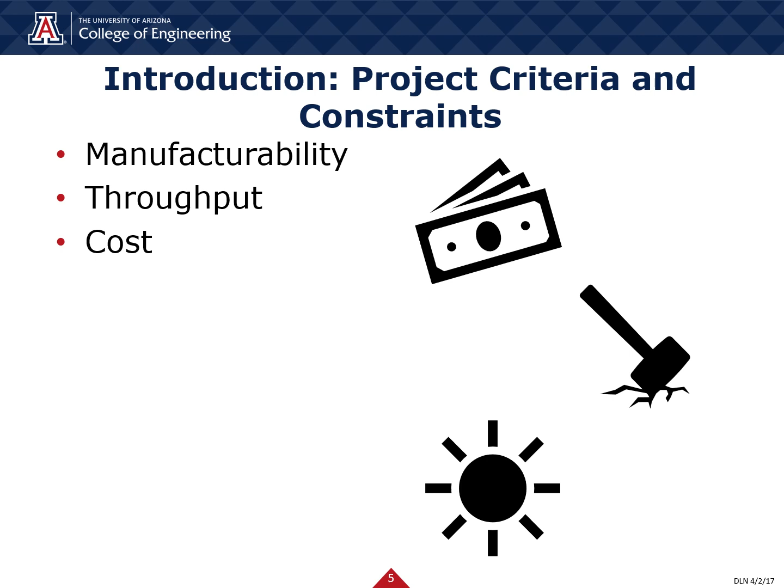The project criteria and constraints include manufacturability or ease of production, throughput as in how many large parts can be made per day, cost in comparison to Hydronalix' current manufacturing cost, density, tensile strength, abrasion resistance, UV or environmental resistance, water absorbance, and buoyancy.

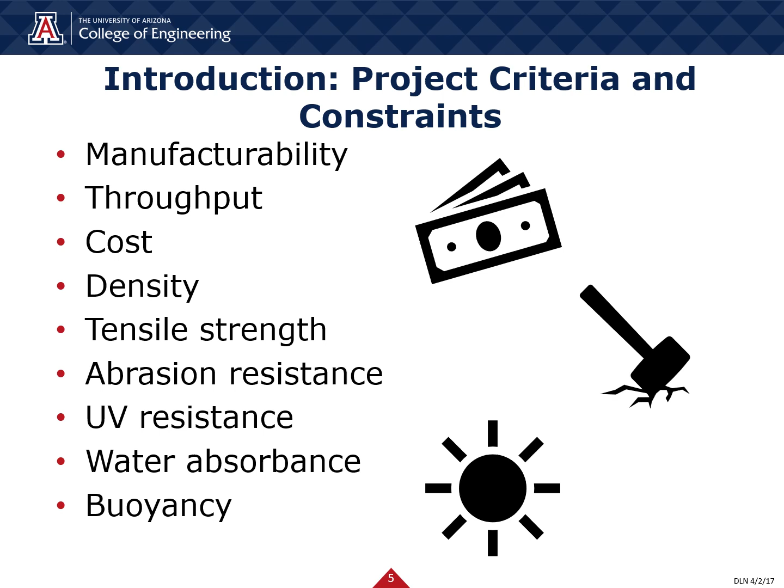Hydronalix currently uses EPP foam, which is expensive and difficult to manufacture, but it is durable and lightweight.

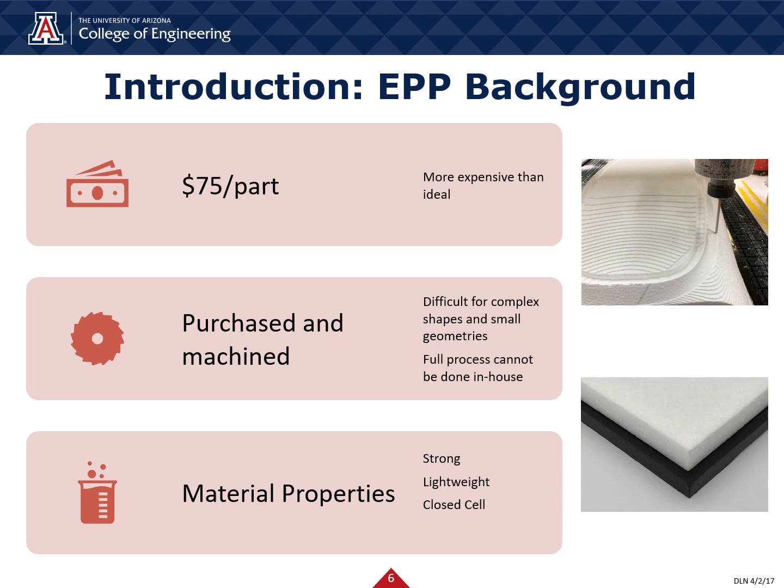In our initial research phase, we discovered hundreds of potential solutions. We first narrowed this down by, per the preferences of Hydronalix, excluding foams which require large and costly foaming machines. Then, through further research and collaboration with Dr. Douglas Loy, we narrowed down our selection to polyurethane foam. We then decided to try two different polyurethane production methods, a two-part polyurethane kit and a custom formulation using raw materials.

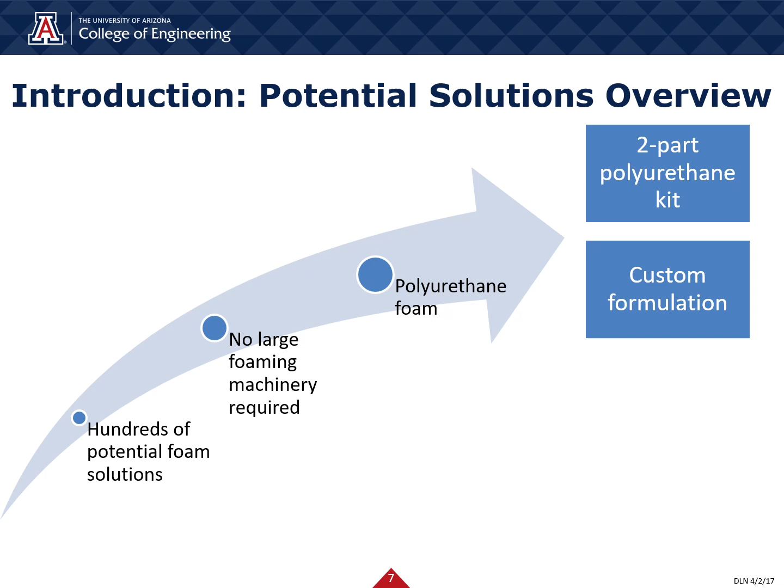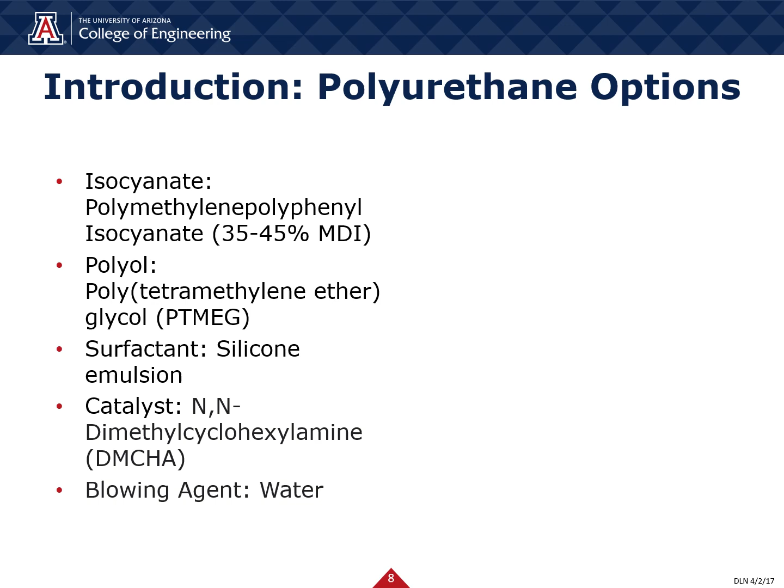Polyurethane foams are made by reacting polyols and isocyanates, along with other reactants for different foam properties. The polyurethane foams used in this experiment were a two-part foam kit and a custom foam formulation.

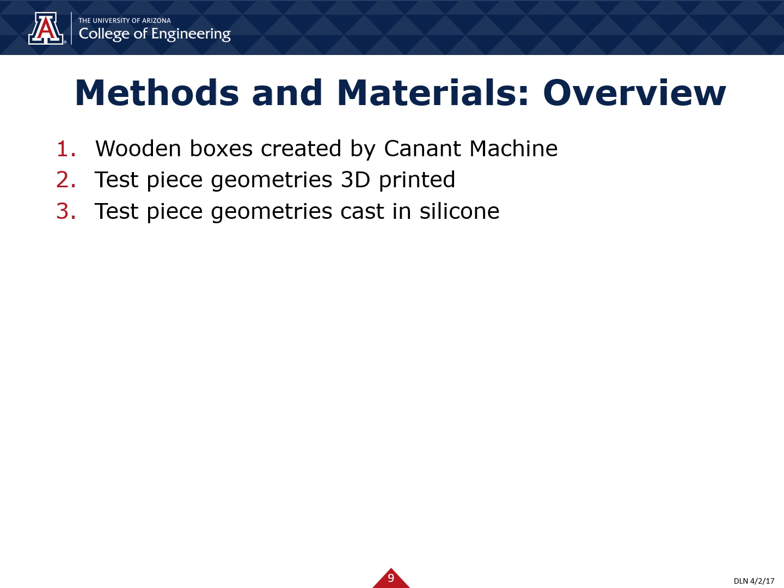To make the foams, wooden boxes were made and silicone was cast around a 3D printed part. Once the mold cured, the components of each foam type were reacted within the mold, and these foam pieces were used for mechanical property testing.

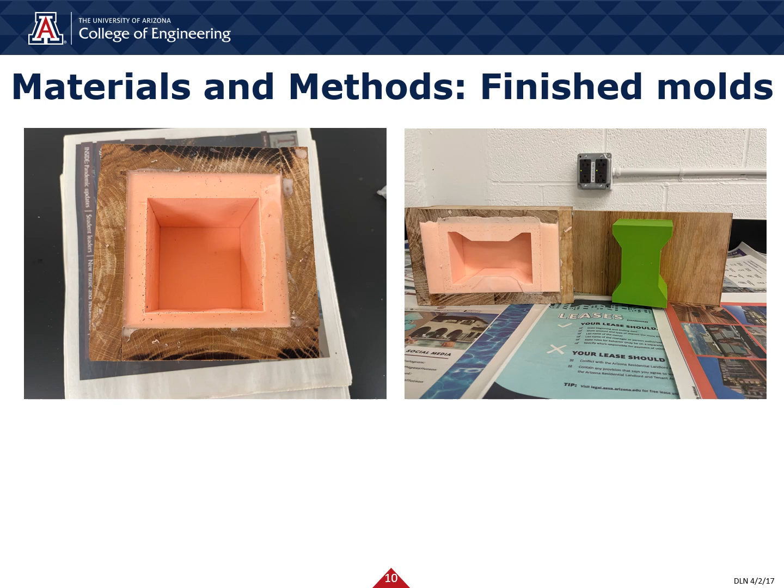Here are the finished silicone molds, one for the cube and one for the dog bone foam shapes.

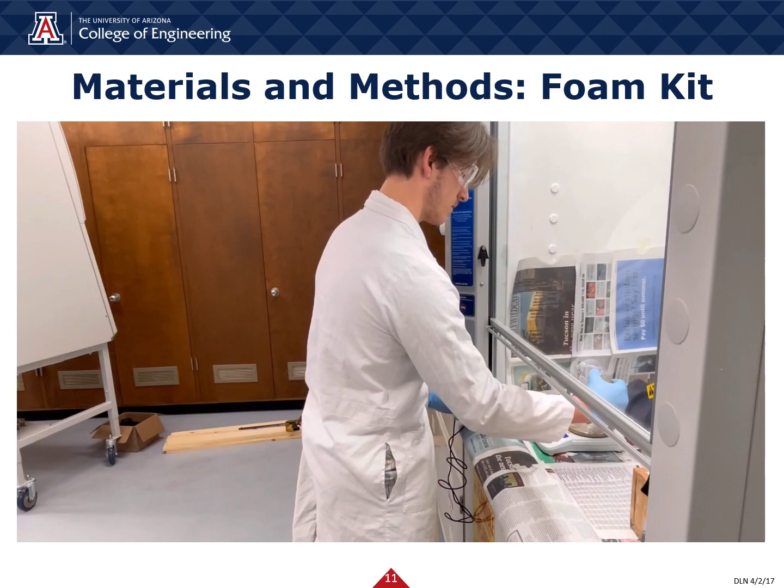Here we can see an early trial run of the two-part foam production. First we measure out the B-side liquid, then the A-side liquid, then the two are combined together, mixed, and added to the silicone mold.

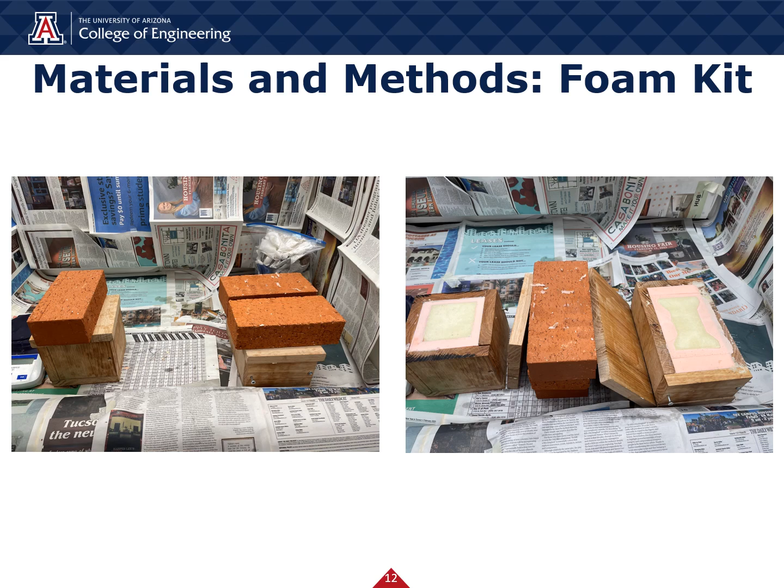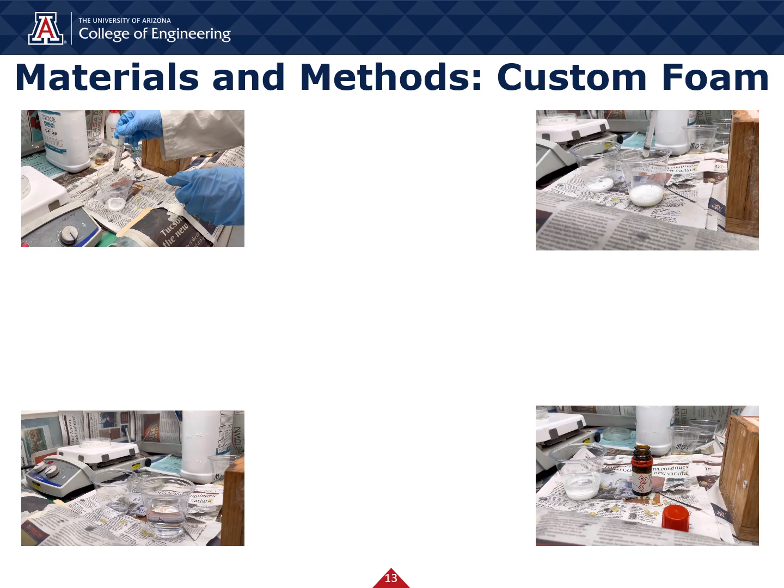The B side of the custom formulation was made by adding water, DMCHA, PTMEG, and surfactant to a clear cup. This mixture was then thoroughly stirred and left in the fume hood to off-gas for 2 minutes.

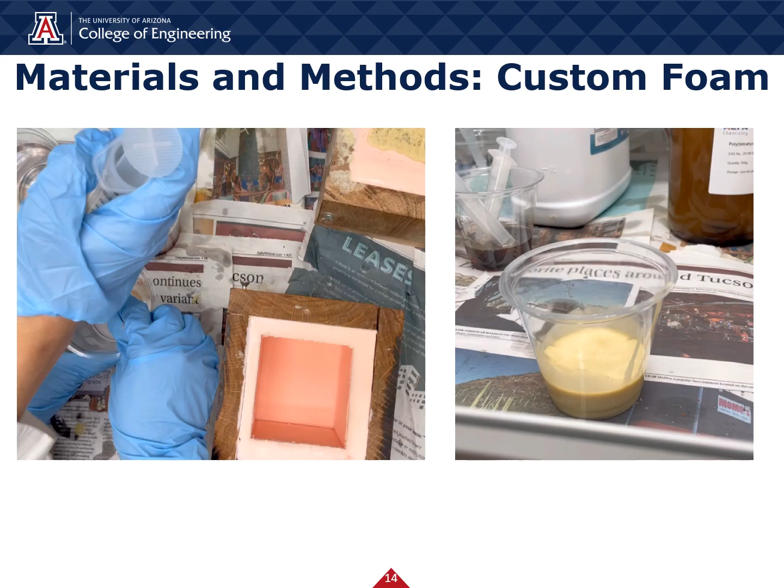Here the MDI solution is added, which reacts with the polyol exothermically. During the reaction, the mixture expands, releases energy, water vapor, and CO2, and then solidifies.

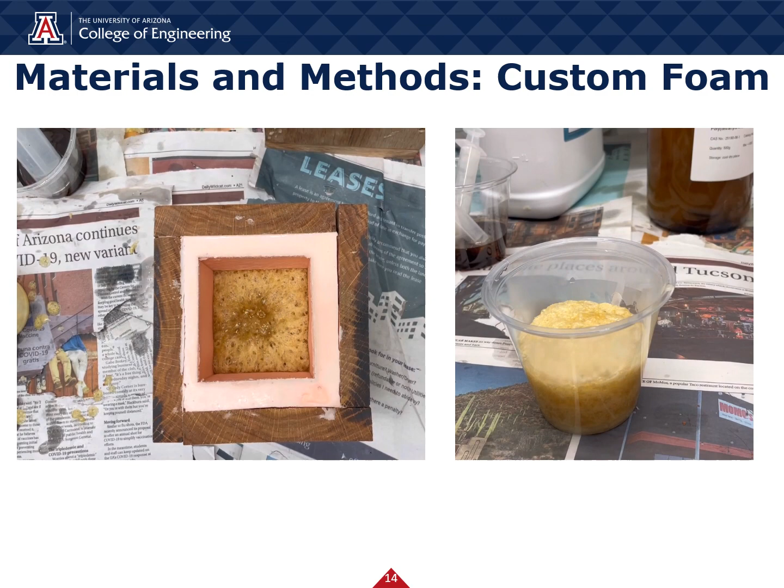After the mixing, on the video on the left, the video plays in real time. You can see that it takes about 20 seconds to complete the reaction after the mixing is complete. On the right is a side view of a trial run that illustrates the complete reaction.

The optimized foam formulation was used to produce samples in the cube and dog bone molds with minimal spillover.

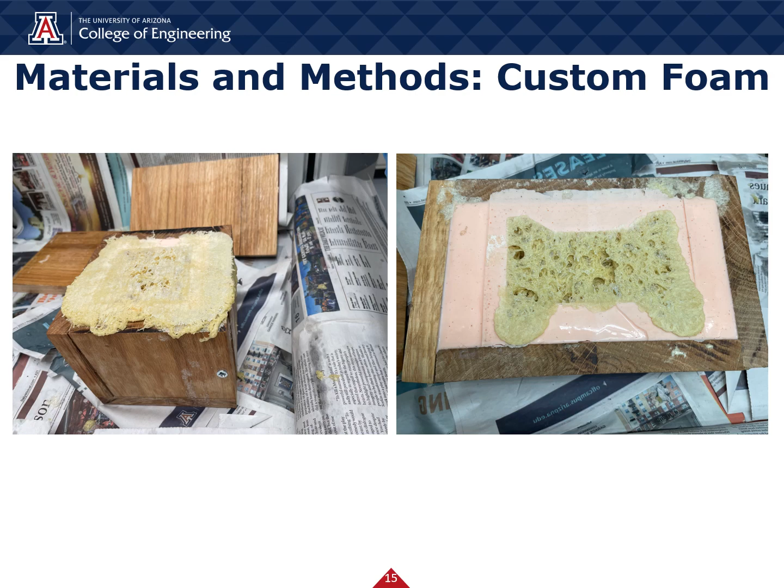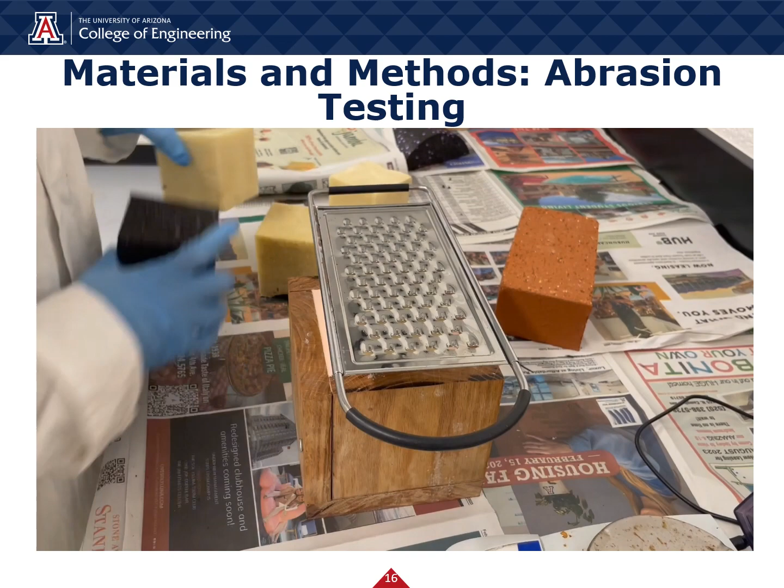Here you can see how we completed our abrasion resistance testing. The first step was to record the initial mass of the cube. The next step was to insert the cube back into one of the silicone molds. The bottom of this mold was filled with additional silicone so that the top of the cube would protrude.

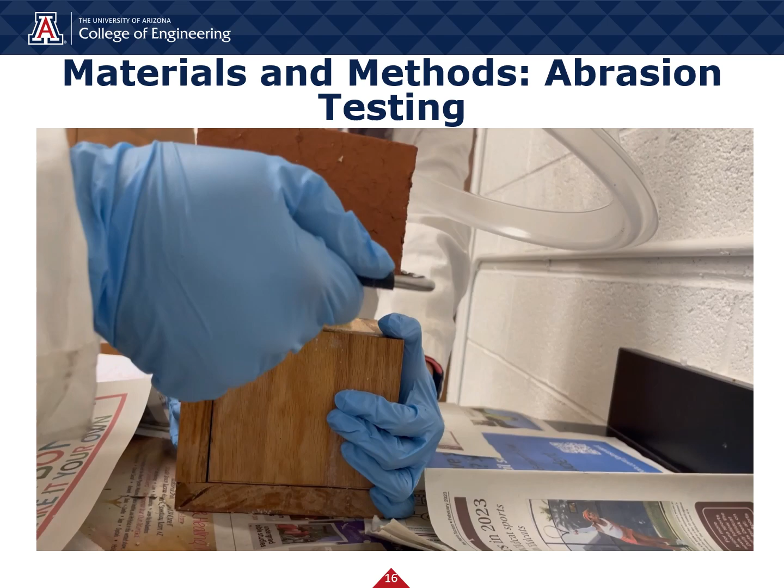Then a cheese grater weighted down with a brick was placed directly on top of the foam samples. 10 complete back and forth motions of the cheese grater were completed. The cube was then removed from the mold, dusted off, and its final mass was recorded. The parameter of interest here was mass lost due to abrasion.

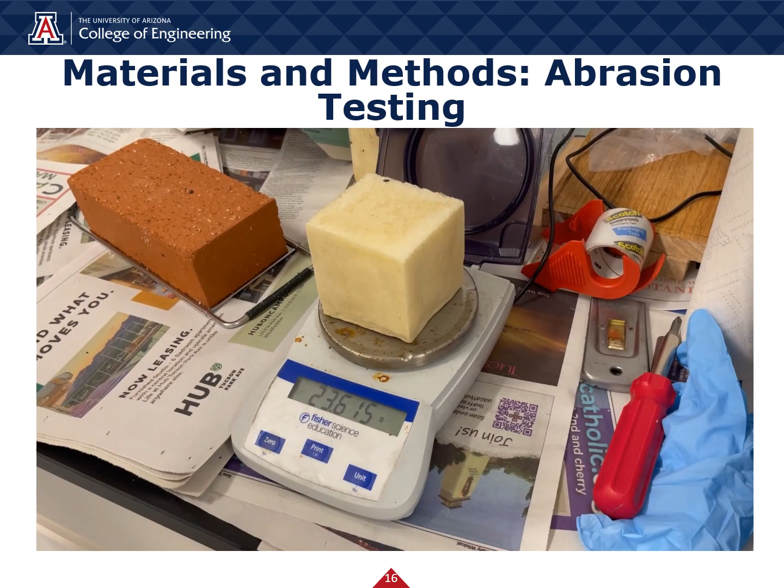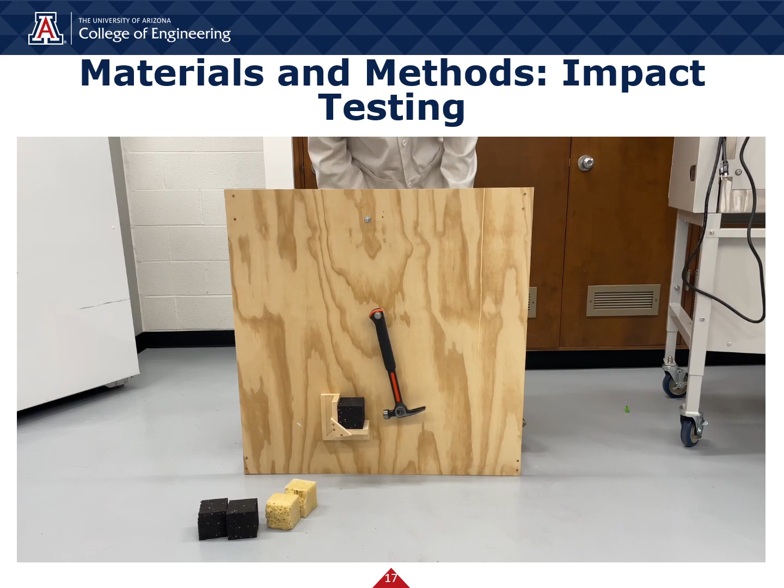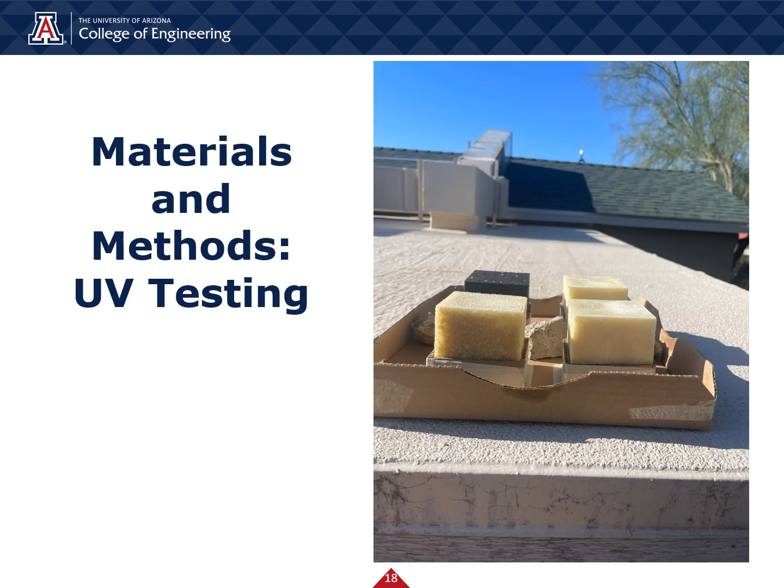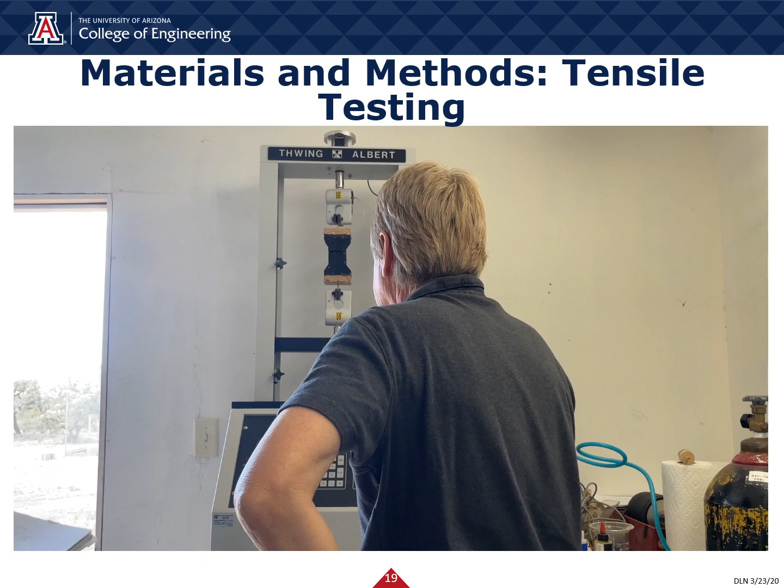Here you can see a time-lapsed example of tensile testing on a tensiometer provided by R3 Aerospace. In this example, an EPP dog bone is pulled apart.

To complete buoyancy testing, we placed our cubes in water and left them for 24 hours. If the cubes were still floating by the end of the test period, that was a pass.

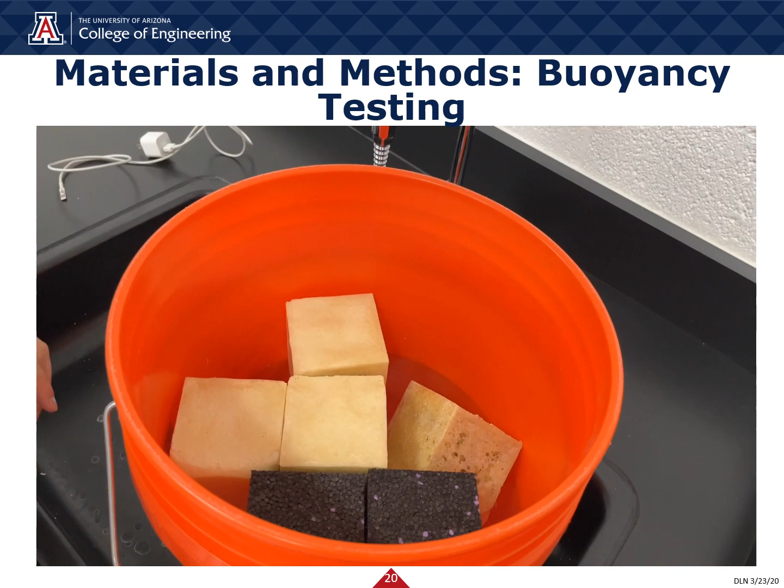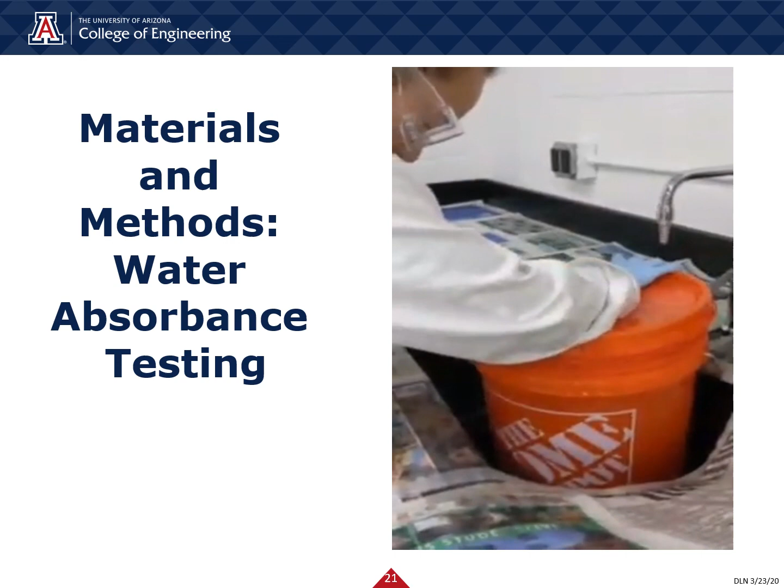Water absorbance was tested by weighing each sample when dry, then submerging the samples under water with a bucket lid for 1 hour, and then patting the excess water off the outside of the samples and reweighing them.

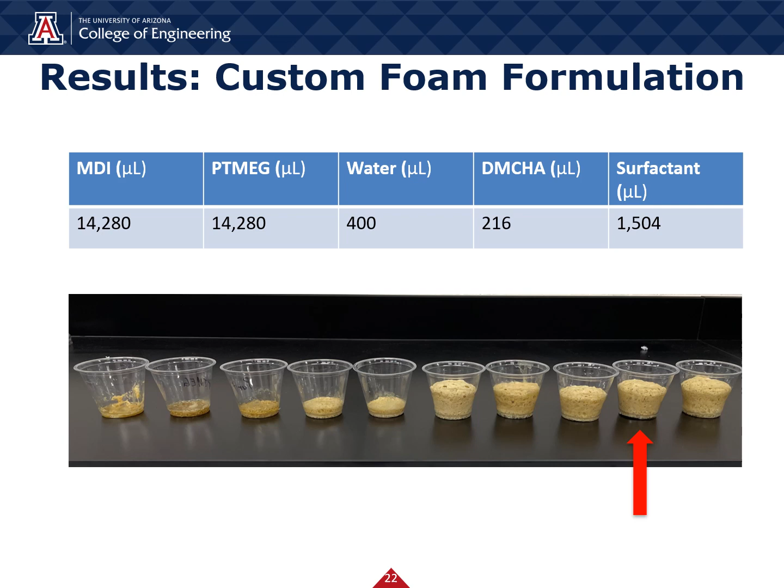Here you can see the results of our foam formulation iterations. The formulation for iteration number 9 is pictured. This formulation resulted in the foam with the most uniform cell size, so we used it for making our test samples.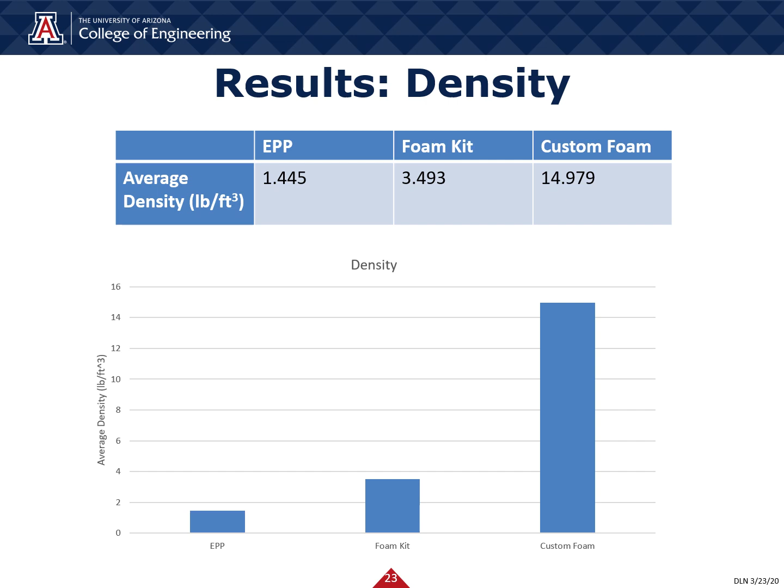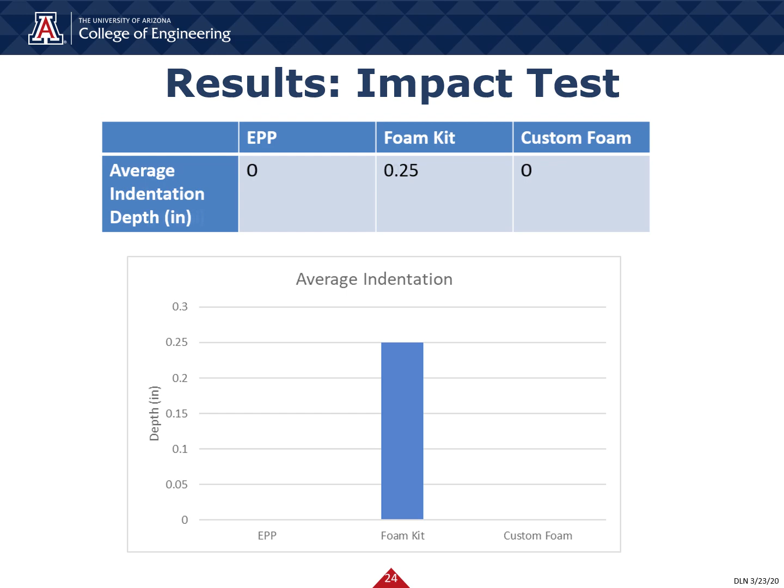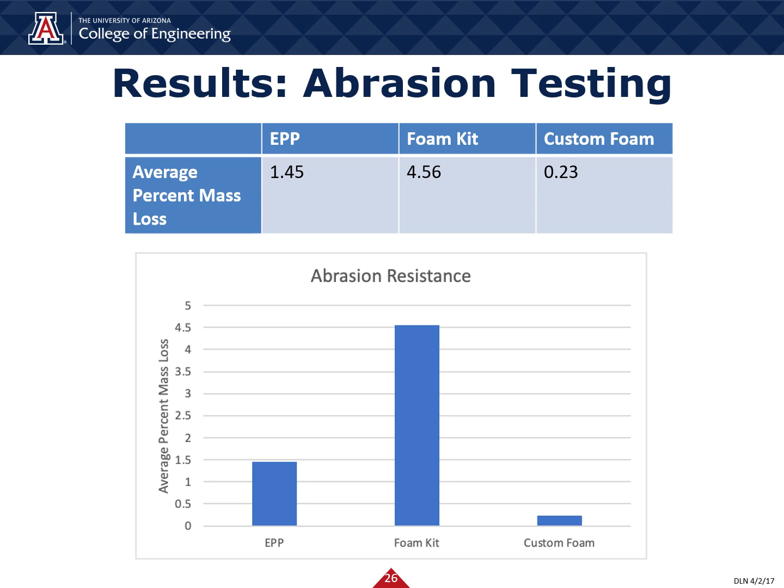The custom foam performed the best in abrasion testing as shown by the minimal lost mass, followed by EPP, while the foam kit performed the worst.

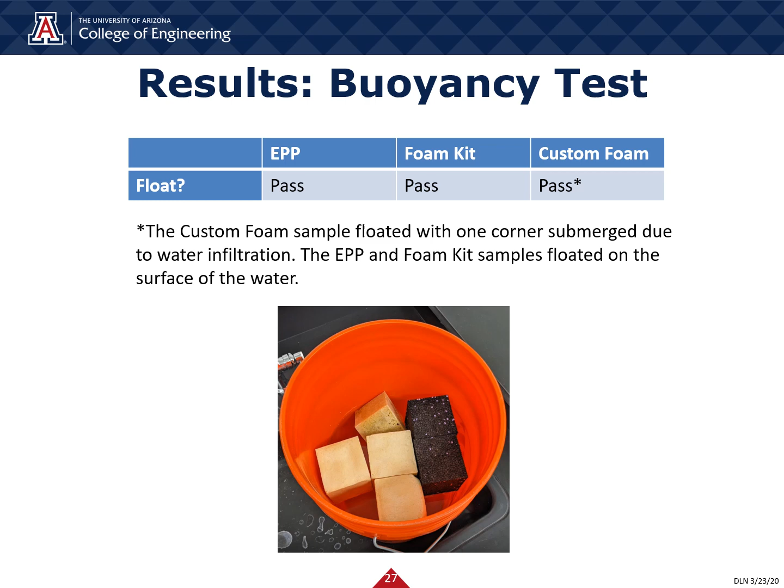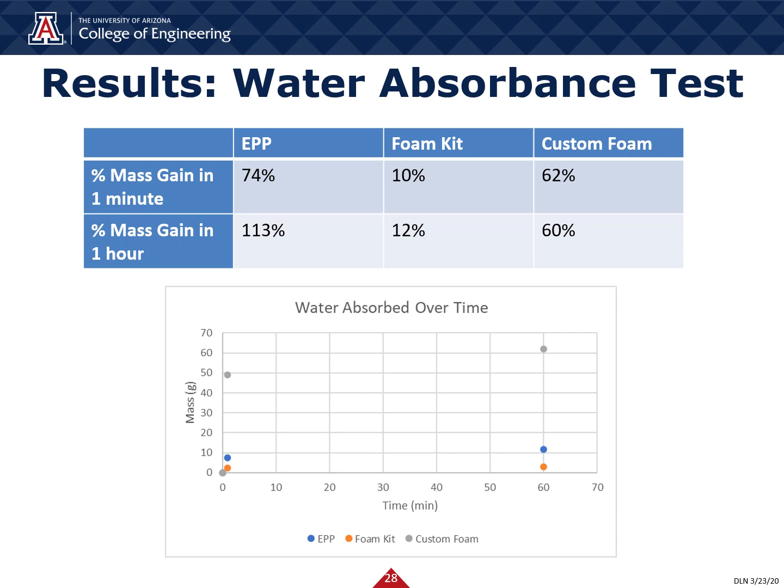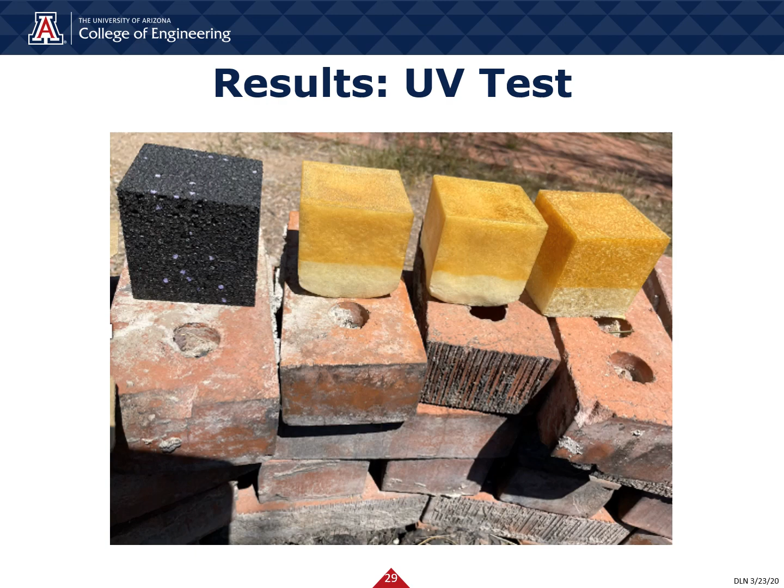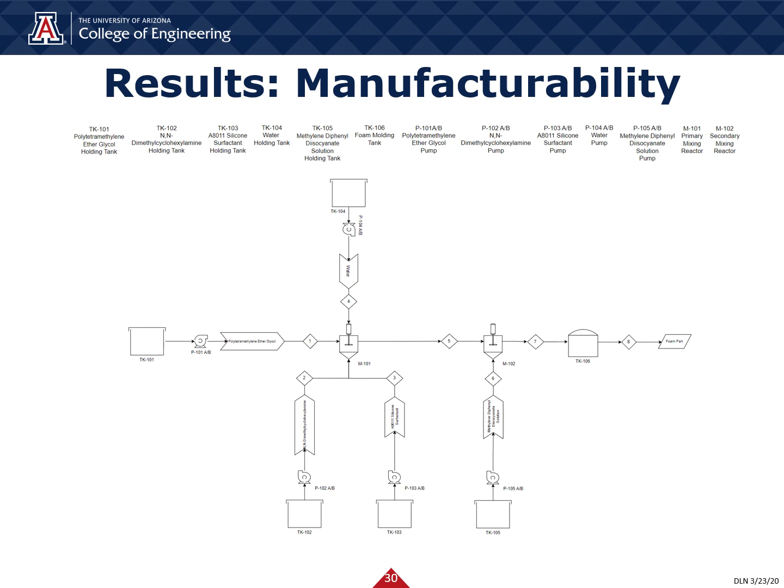Here is a PFD that represents the scaled-up process of our custom foam production. All components except MDI are fed to a primary mixer, then mixed, then sent to a secondary mixer with MDI. From the secondary mixer, the mixture is sent to a molding tank where it will react and cure and become a finished foam part.

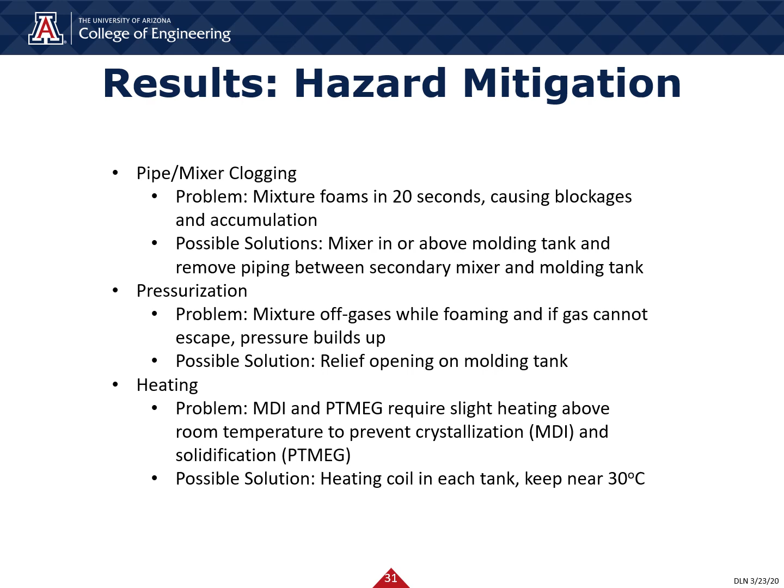The main hazards realized during testing include pipe/mixer clogging, overpressurization, and heating requirements. The possible solutions to these problems include finding an optimal secondary mixer location, creating a relief opening, and adding heating coils to the specific tanks.

The EPP foam currently used by Hydronauts costs about $75 per part to produce. It is estimated that either the foam kit or the custom foam would reduce this cost by over threefold.

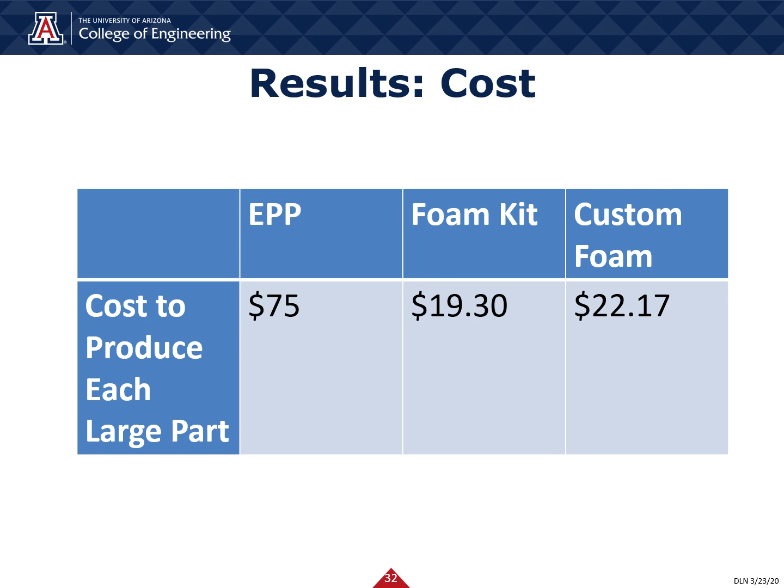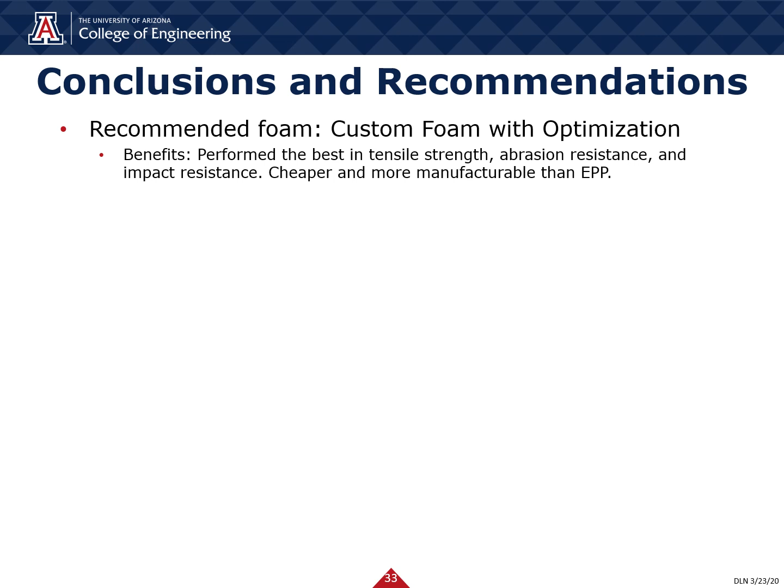Based on these experiments, an optimized custom foam is recommended to Hydronauts. The custom foam was more durable than either the foam kit or the EPP. It is also cheaper and easier to produce than EPP. However, the custom foam is too dense for Hydronauts' applications, so further optimization is required.

Further research into product accumulation in the automated scaled-up process and further formulation optimization are recommended.